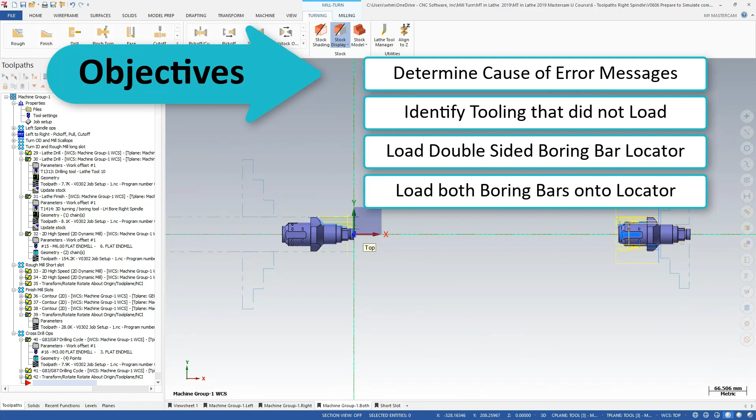We have completed a lot of operations at this point. In a normal workflow, I might have checked simulation more often. For learning purposes, I waited until all the right spindle ops were completed so we can fix all the issues at the same time. I'm going to post into the Sync Manager,

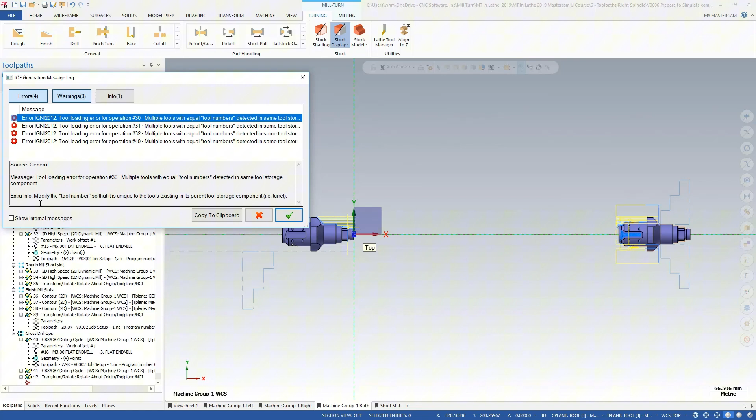and you can see that an error message comes up, 4 actually, and it says tool loading error for operation 30, 31, 32, and 40. And down below it says in the extra info, modify the tool number so that it's unique to the tools existing in its parent tool storage component, for example the turret. Well, let's see if we can investigate this and figure out what this is trying to tell us.

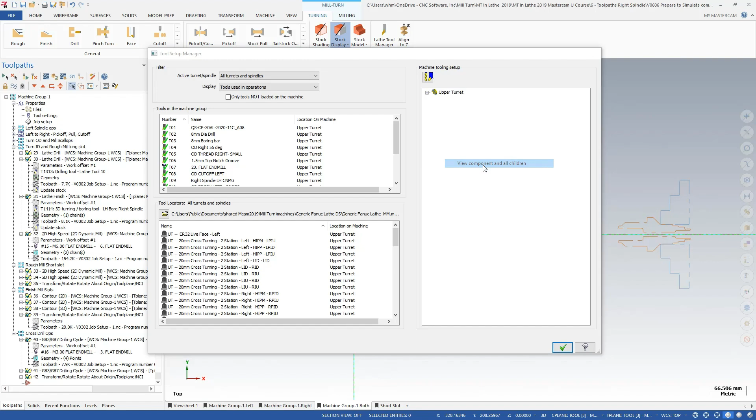So it was operations 30, 31, 32, and 40, and the tools used in them are 13, 14, 15, and 16 respectively. I'm going to open up the Tool Setup Manager, and I'm going to view Component and All Children. Every index position on the turret is full, and each index position only has one tool on it. The auto load feature will only load into single station locators.

So if we have 12 positions on the turret, it stands to reason that tool number 13, 14, 15, and 16 have nowhere to go. So we need to determine how to get these 4 tools onto the turret. What we'll do is we'll remove some of the single station locators and use locators with multiple stations.

An alternative workflow would have been to manage our tools and locators as we processed our part and before posting it to the Sync Manager. This would eliminate the need for Mastercam to load the tools for us. Mastercam will respect the tools that we put on the turret. Selecting the locators that get loaded on the turret in the Tool Setup Manager before posting will be the preferred method for many programmers. Let's look at the lathe tools we need to load first.

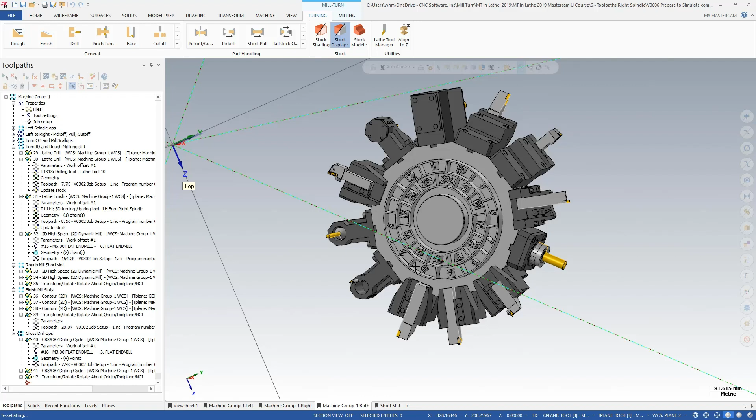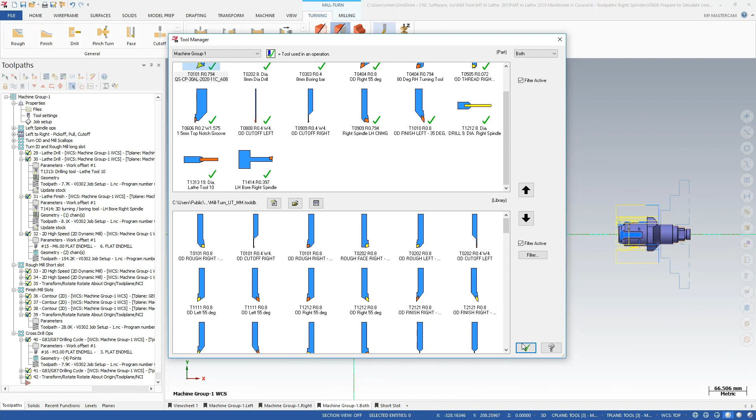So I'm going to go into the Lathe Tool Manager, and we can see that tool number 13 is our flat bottom drill, and tool number 14 is a boring bar pointed to the right spindle in an insert down condition. I'm going to go back into the Tool Setup Manager.

We have access to a reasonable variety of locators in the Mastercam library down here in the left hand corner. In a real world situation, you would need to work with the locators available at your disposal. Any locators in your shop that are not in the Mastercam library can be added by your reseller. I'm going to right click on the upper turret and we'll expand all. I'm going to start by loading a double-sided boring bar locator to put both boring bars in.

So if I look down here in my locator library, we can see that I have a 32mm boring bar locator. That's a 2 station. But I need somewhere to put it. So I'm going to take the existing 32mm boring bar holder. I'm going to remove the component and all the children. I'm going to take this 32mm boring bar holder, that's a 2 station. I'm going to drag it up into index position 3.

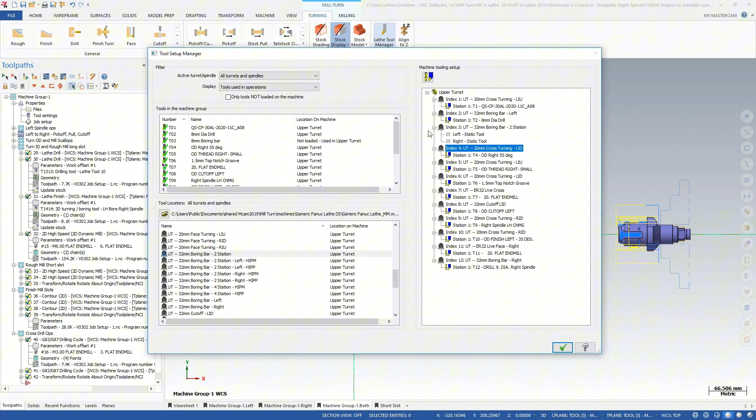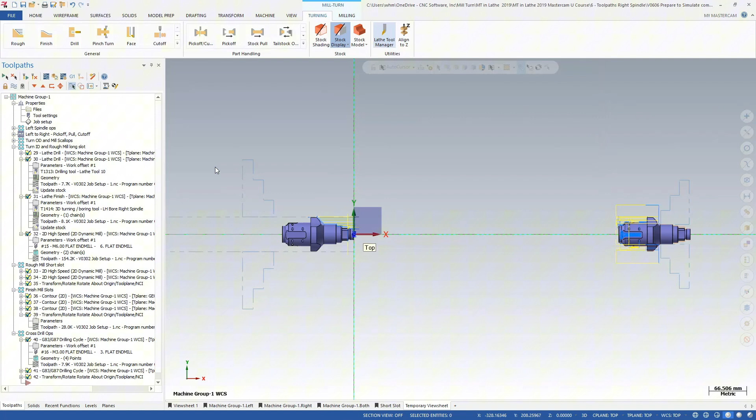Now you'll notice that our 8mm boring bar, which was previously loaded into 3, is not loaded currently. I'm just going to put that back where it came out of. And our boring bar, which is tool number 14, I'm going to double click on that, and it's 3D tooling. And I'm going to change that to number 3 because the tool number needs to match the station that it's going into. So we'll allow it to change our operation.

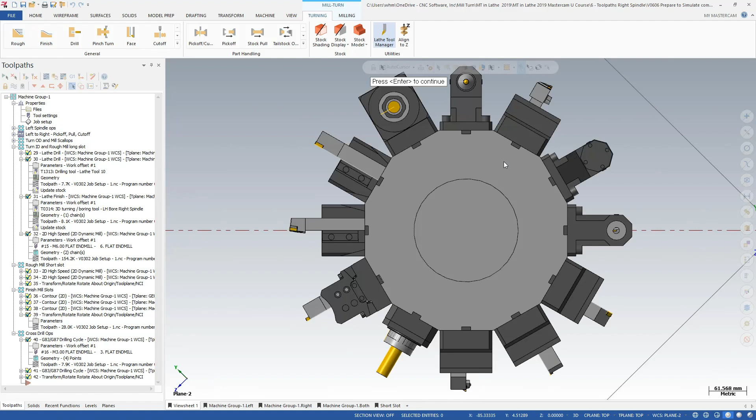So now I have 2 tool number 3s. And I'm going to drag tool number 3 into the right side of that holder. Now if I take a look at all the components on the turret, and position number 3, it would be oriented this way, this towards the left and this towards the right. So we might want to move that out a little bit. We'll come back to that later.

We have successfully loaded our first multi-station holder. We have 1 down and 3 to go.